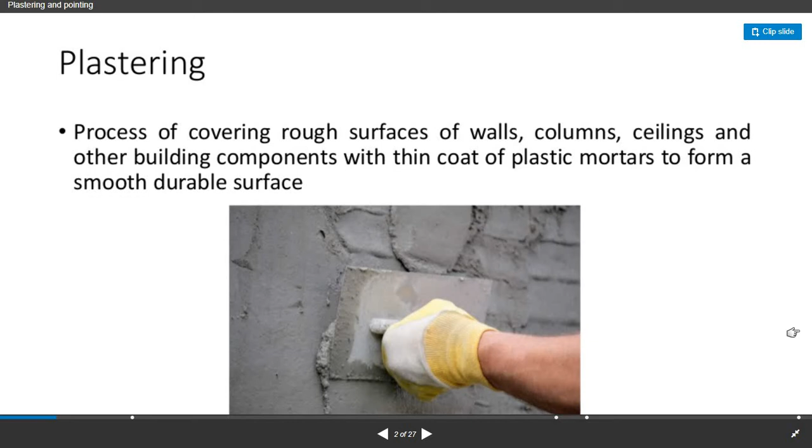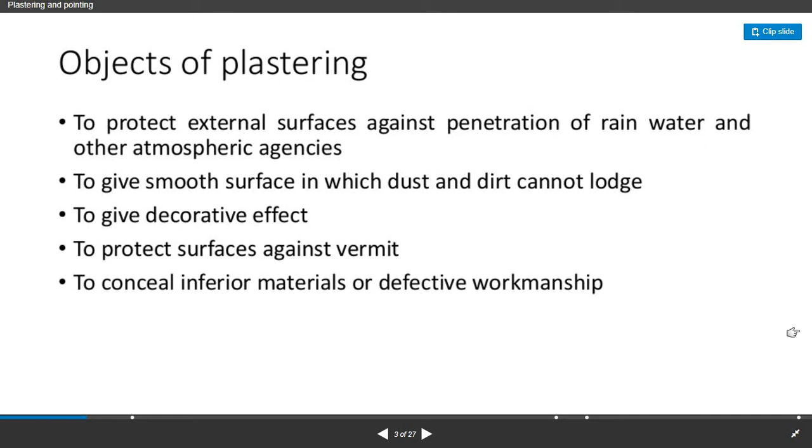The objects of plastering: plastering work is done to protect the external surface against penetration of rainwater and other atmospheric agencies, to give a smooth surface in which dust and dirt cannot lodge, to give a decorative effect, to protect surfaces against vermin, and to conceal inferior materials or defective workmanship.

The types of mortar for plastering. First is lime mortar, which may be either fat lime or hydraulic lime. Fat lime yields good putty after slaking and is preferred more. Hydraulic lime contains particles which slake very slowly, and slow slaking may cause blisters.

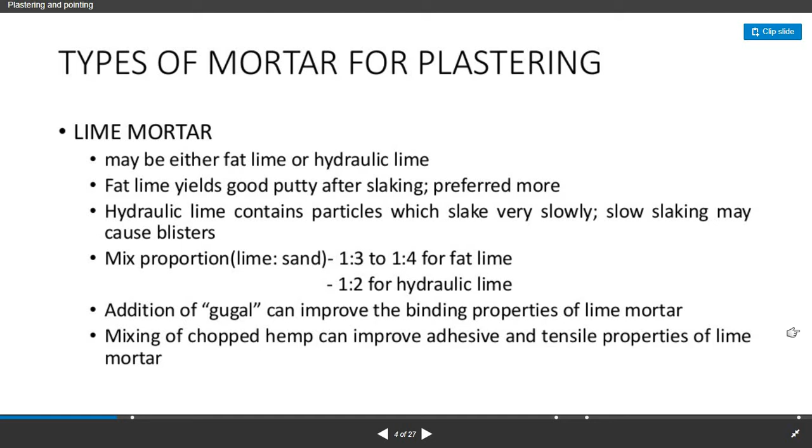The proportion of lime to sand should be between 1:3 to 1:4 for fat lime, and 1:2 for hydraulic lime. Addition of gugal can improve the binding properties of lime mortar. Mixing of chopped hemp can improve the adhesive and tensile properties of lime mortar.

Cement mortar, being non-absorbent, is best for external plastering work, preferred in damp rooms and damp climates. It is stronger than lime mortar, and does not possess sufficient plasticity. Its mixed proportion of cement to sand should be between 1:4 to 1:6. Mortar should be used before initial setting takes place. Sand used should be clean, coarse and angular.

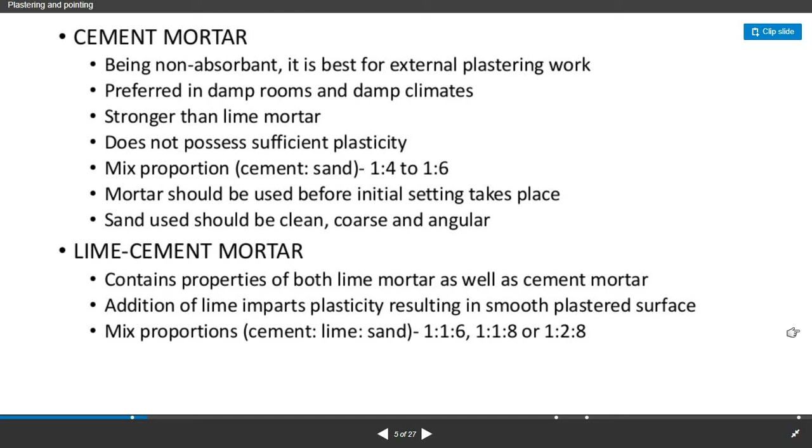Lime cement mortar contains properties of both lime mortar as well as cement mortar. Addition of lime imparts plasticity, resulting in a smooth plastered surface, and its mixed proportion should be 1:1:6 or 1:1:8 or 1:2:8.

The preparation of background: the joints should be raked to a depth of 10 mm in brick masonry and 15 mm in stone masonry for providing key to plaster. Mortar droppings and dust should be removed with a wire brush. Unevenness is leveled before applying mortar.

Surface should be washed with clean water uniformly to produce optimum suction. Excess soaking with water may cause sliding of mortar before it sets. Less moisture may cause strong suction, which withdraws moisture from mortar and makes it weak.

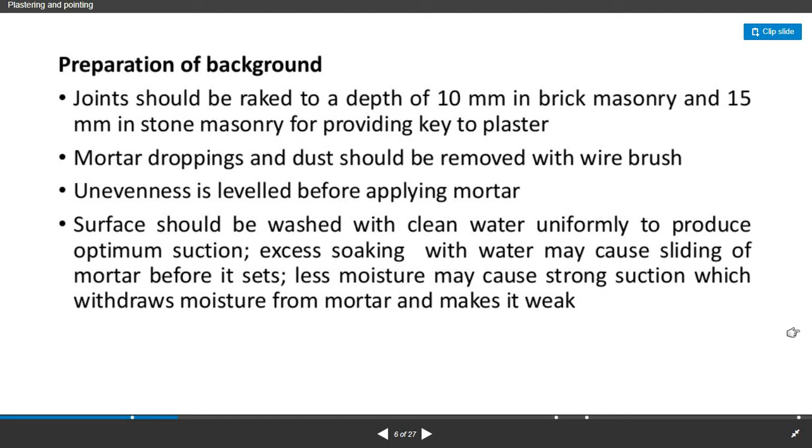Now we shall discuss about the methods of plastering. Lime plaster is applied in 3 coats or in 2 coats. First we shall discuss the 3-coat plaster.

The application of the first coat: mortar is forcibly applied with mason's trowel and pressed well into joints and over the surface, with a normal thickness of 12 mm. The surface is allowed to slightly harden and then scratched crisscross, and left to set for 7 days.

Next is the application of the second coat. The rendering coat is cleaned off all dirt and loose material, and is lightly wetted. Patches are applied at suitable spacing to act as gauges. Mortar is then thrown with mason's trowel and spread and rubbed with a wooden float.

In case of lime surkhi plaster, the surface is allowed to slightly harden and then scratched crisscross, and it is left to set for 10 days.

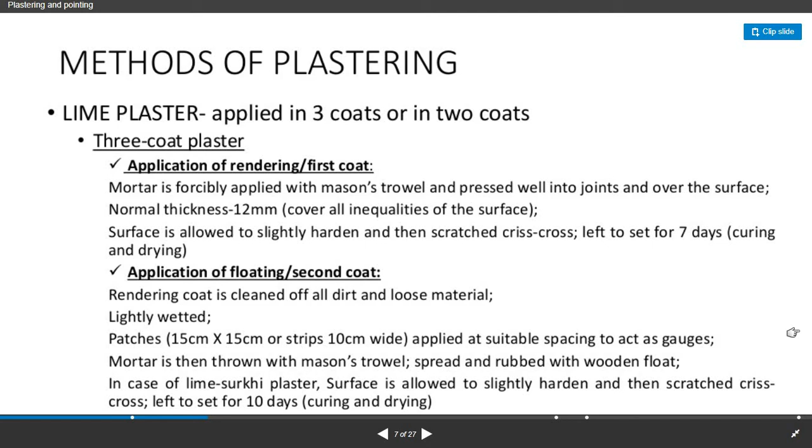The application of finishing coat: in case of lime sand mortar, finishing coat is applied immediately after the floating coat. It consists of lime cream and sand, applied with a steel trowel and rubbed and finished smooth. It is left for 1 day and then curing is done for at least 7 days.

In case of lime surkhi mortar, finishing coat is applied after 7 days of the floating coat, after cleaning the surface. The finishing coat is rubbed hard and finished smooth.

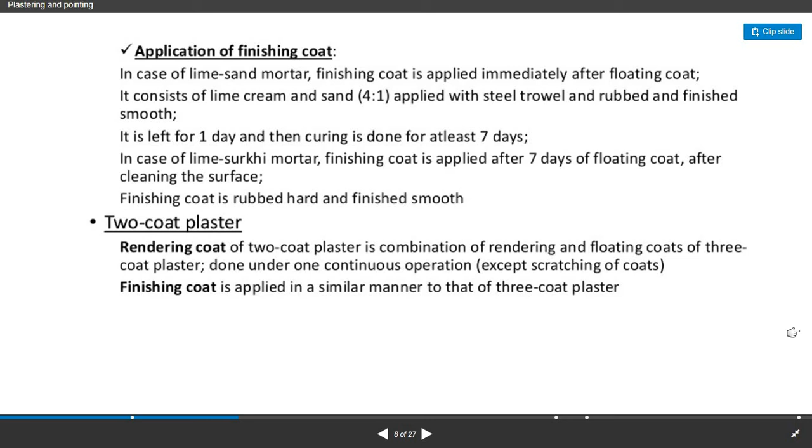Two-coat plaster: the rendering coat of two-coat plaster is a combination of the rendering and floating coats of three-coat plaster, done under one continuous operation, and the finishing coat is applied in a similar manner to that of three-coat plaster. This includes cement plaster and cement lime plaster. First we shall discuss the two-coat plaster.

In order to maintain uniform thickness of plaster, screeds are formed of plaster on the wall surface by fixing dots of 15 cm by 15 cm. Two dots are formed in a vertical line at a distance of about 2 meters by means of a plumb bob.

A vertical strip of mortar known as a screed is then formed. A number of such vertical screeds are formed at suitable spacing. Cement mortar is then applied on the surface between the successive screeds and the surface is properly finished.

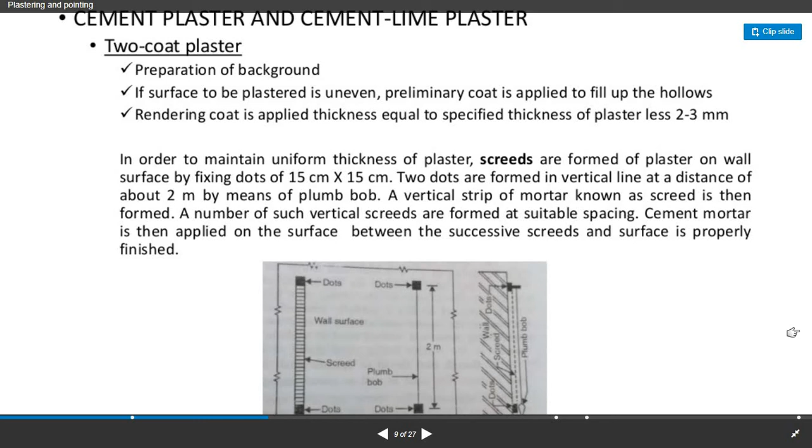The rendering coat is kept wet for at least 2 days and then allowed to dry completely. The rendering coat is again dampened evenly before applying the final coat. The final coat is applied with wooden floats and finished with steel trowels. To eliminate joining marks, the finishing coat should be applied starting from top towards bottom and completed in one operation.

The next one is the three-coat plaster. The intermediate coat, known as the floating coat, is applied here, and the rendering coat has a thickness of 9 to 10 millimeters. The floating coat has a thickness of 6 to 9 millimeters, and the finishing coat is applied with a thickness of 2 to 3 millimeters.

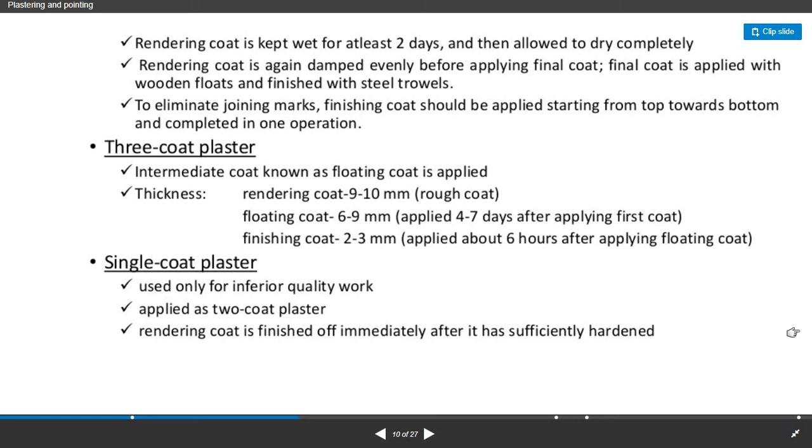Single coat plaster is used only for inferior quality of work and is applied as a two-coat plaster. The rendering coat is finished off immediately after it has sufficiently hardened.

Now we shall discuss some of the special materials used in plastering. First is acoustic plaster. It contains gypsum mixtures and is applied as the final coat. It undergoes a chemical reaction resulting in production of gas bubbles and tiny openings in the coat. These honeycombed openings absorb sound and it is useful in interior walls of halls, auditoriums, etc. It is applied in two coats, each of 6 millimeters.

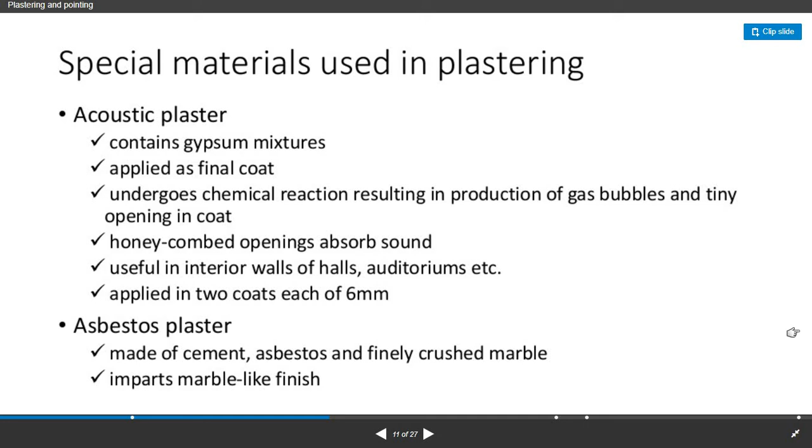Asbestos plaster is made of cement, asbestos and finely crushed marble. It imparts a marble-like finish.

Barium plaster is made from cement, sand and barium sulfate, and it is provided in X-ray rooms to protect persons working in it. Granite silicon plaster is used for superior type of construction and has a quality of quick setting. It possesses high elastic properties which eliminate cracks.

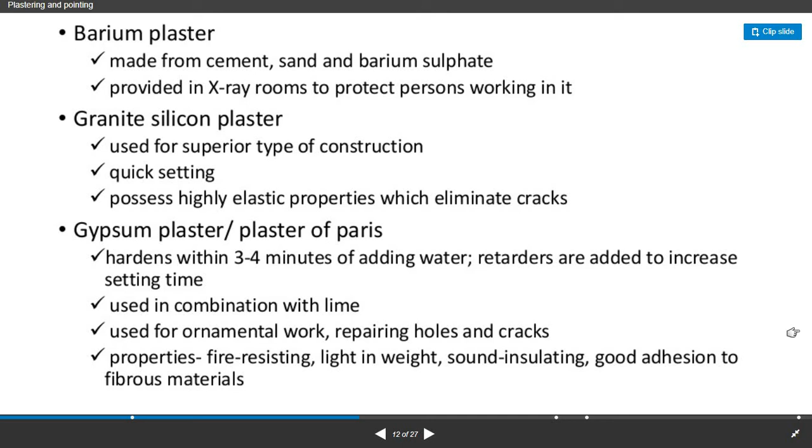Next, gypsum plaster is used in combination with lime. It is used for ornamental work and repairing holes and cracks. It has got fire resistance property. It is light in weight. It has got the property of sound insulation. It has got good adhesion to fibrous materials.

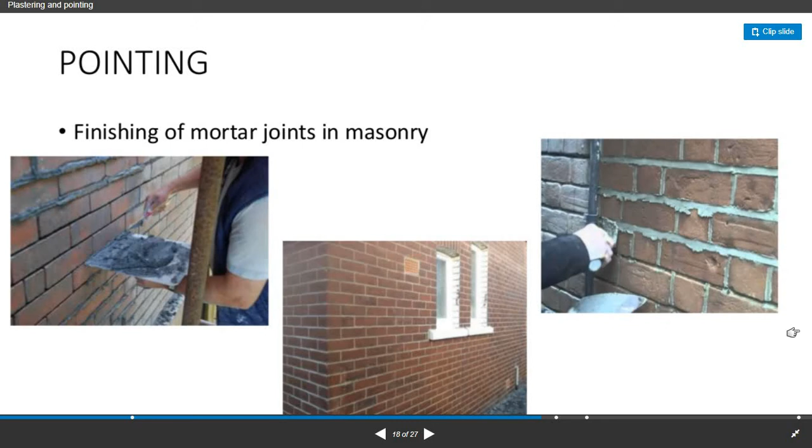Next, we shall discuss pointing. Finishing of mortar joints in masonry is known as pointing. Pointing consists of raking the joints to a depth of 10 to 20 millimeters and filling it with better quality mortar in the desired shape.

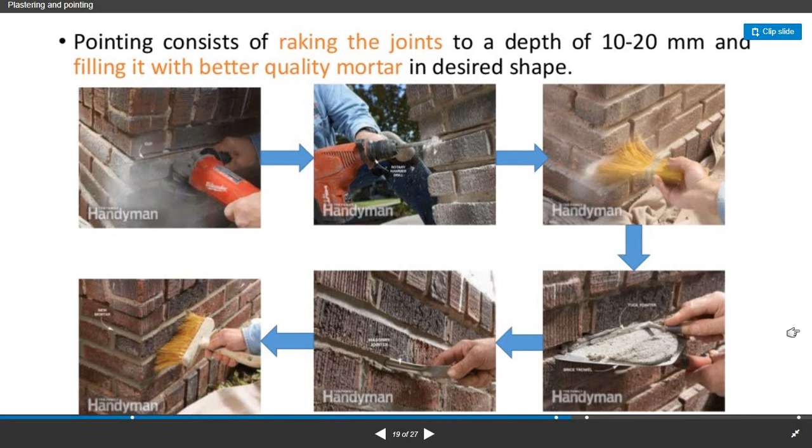What does raking mean? Raking out joint is the process in which you cut out a recess in the brickwork mortar joint. When you have raked out all the joints, you can plaster the wall and the plaster grips in the raked out joint.

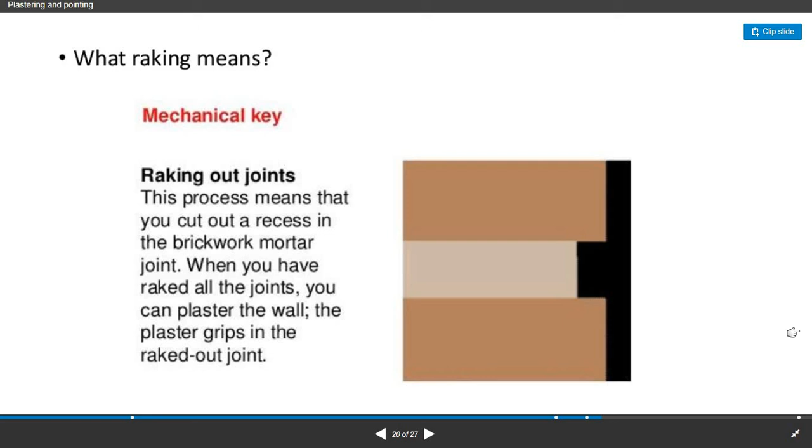Pointing is done with the following mortar mixes: first is lime mortar, second is cement mortar.

Preparation of the surface for new work: the joints are raked down to a depth of 20 mm while the mortar is still soft. Surface and joints are cleaned and thoroughly wetted.

For old work, loose pointing and superfluous mortar on the surface and joints are removed. The surface and joints are cleaned and thoroughly wetted.

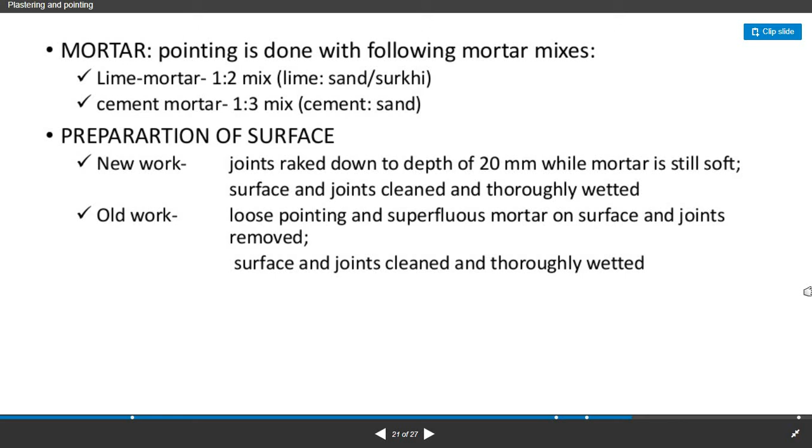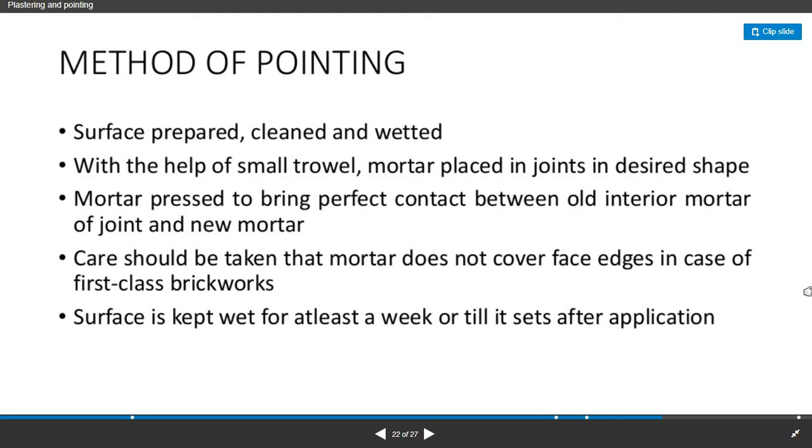The method of pointing: first, the surface is prepared, cleaned and then wetted. With the help of a small trowel, mortar is placed in joints in the desired shape. Then the mortar is pressed to bring perfect contact between the old interior mortar of the joint and the new mortar. Care should be taken that the mortar does not cover face edges in case of first class brickwork. The surface is kept wet for at least a week or until it sets after application.

The types of pointing: first is flush pointing, formed by pressing mortar in the raked joint and finishing off flush with the edge of masonry units. Edges are neatly trimmed with a trowel and straight edge, and it does not give a good appearance. It is durable as it does not provide any space for accumulation of dust and dirt, etc., and it is very extensively used.

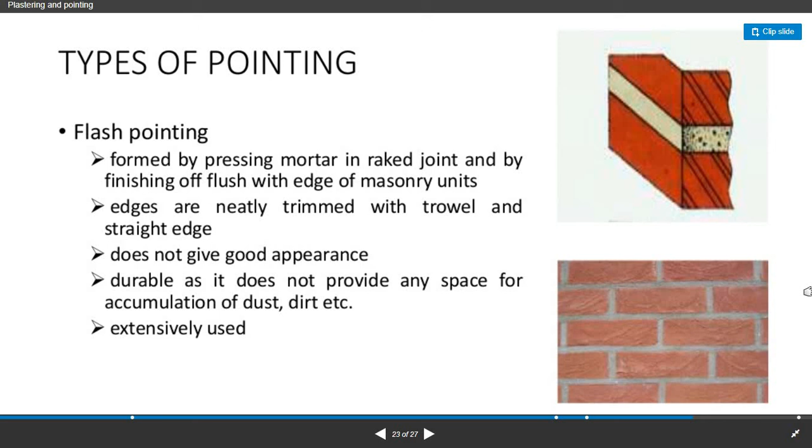Next is recessed pointing. The pointing is done by pressing the mortar back from the edge by 5 mm or more. The face of pointing is kept vertical and it gives a very good appearance.

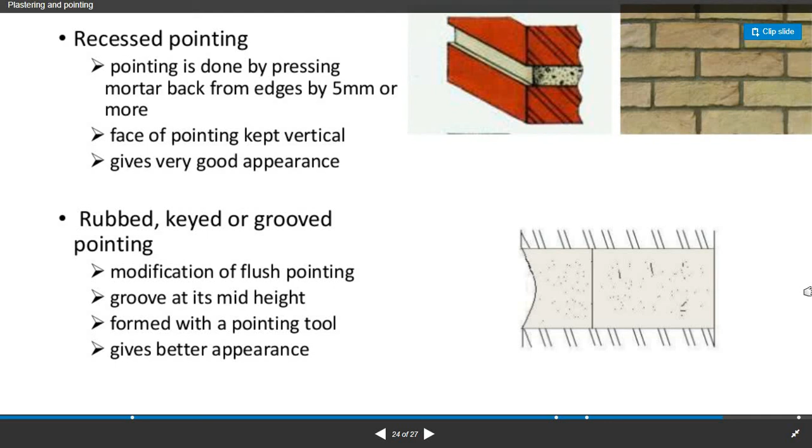The rubbed, keyed or grooved pointing is a modified form of flush pointing, and the groove is at its mid height. It is formed with a pointing tool and it gives a better appearance.

Beaded pointing is formed by steel or iron with a concave edge. It gives good appearance but is liable to damage easily.

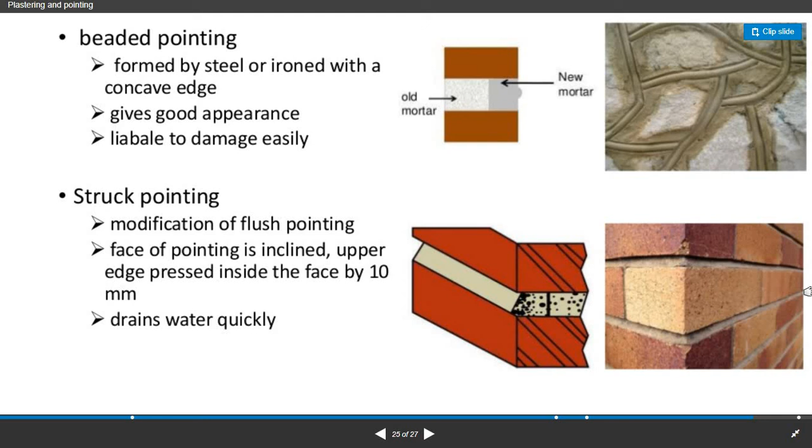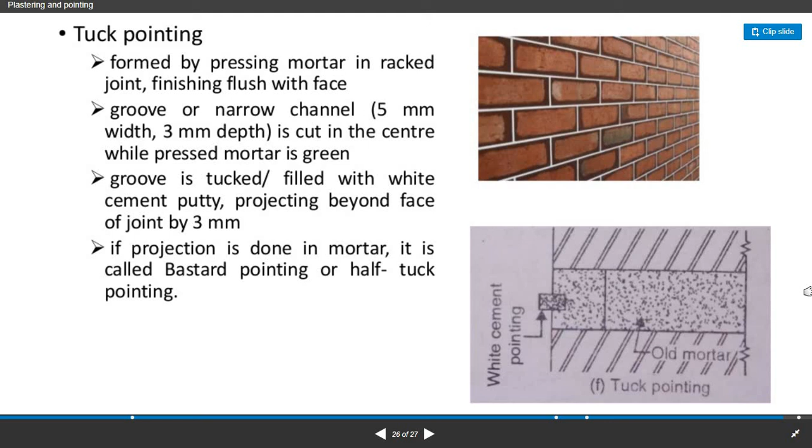Struck pointing is a modified form of flush pointing. The face of pointing is inclined and the upper edge is pressed inside the face by 10 mm, and it drains water quickly. Tuck pointing is formed by pressing the mortar in the raked joint, finishing flush with the face.

V pointing is forming a V groove in a flush finishing face. Weathered pointing forms a V-shaped projection.

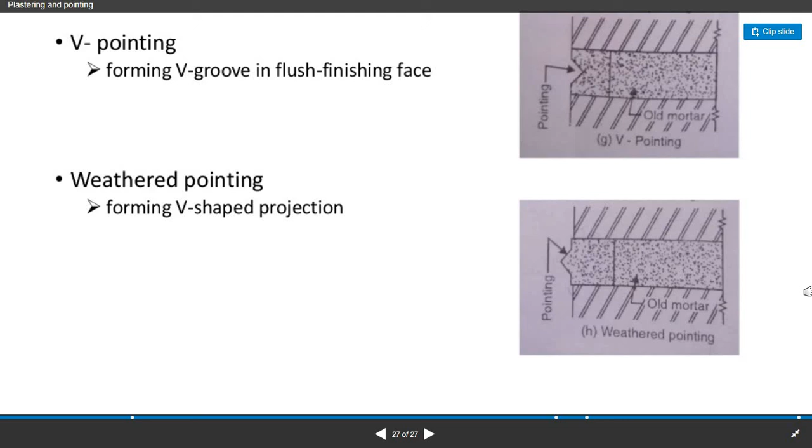So with this we have covered the chapter on plastering and pointing. We have also discussed different types of plastering and different types of pointing work. So thank you students.